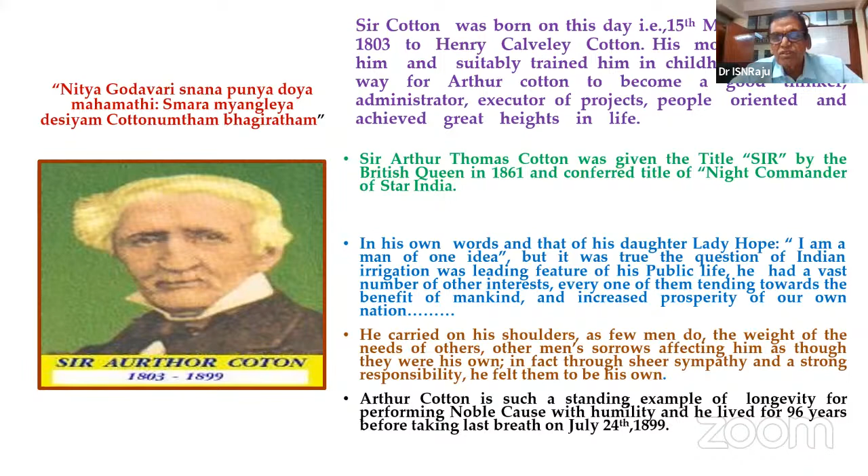So these are some of the achievements I told you about. I think everybody thinks Cotton is only a Delta man, but actually he is a pan-India man. He contributed his might on behalf of the East India Company, which ruled India at that time - so even in the north, south, everywhere.

Even in Visakhapatnam, there was harbor and sea erosion issues. I am told that Sir Arthur Cotton gave his idea of dumping an old ship to avoid sea coast erosion. Like that, he did a lot of things.

And the reason why I have taken this other topic is Krishna Anaket. Actually, Sir Arthur Cotton, after building the Godavari Anicut, conceived and planned for the Krishna Anaket, but he was otherwise engaged, so he gave the responsibility to Captain Orr. So there is a lot of contribution of Sir Arthur Cotton for the Krishna Anaket also. So this is about Sir Arthur Cotton.

The beauty of these Krishna Godavari barrages is there. Still, we can remember Sir Arthur Cotton because the old Anaket, some of the components of the energy dissipation elements, are still part of the new barrages that were constructed. They were used, and the whole Anaket was strengthened because of some components of the new barrages, and the cost was also very, very less. So we can see the resemblances of the old Anaket if you go to Dowlaiswaram and also to Prakasam barrages.

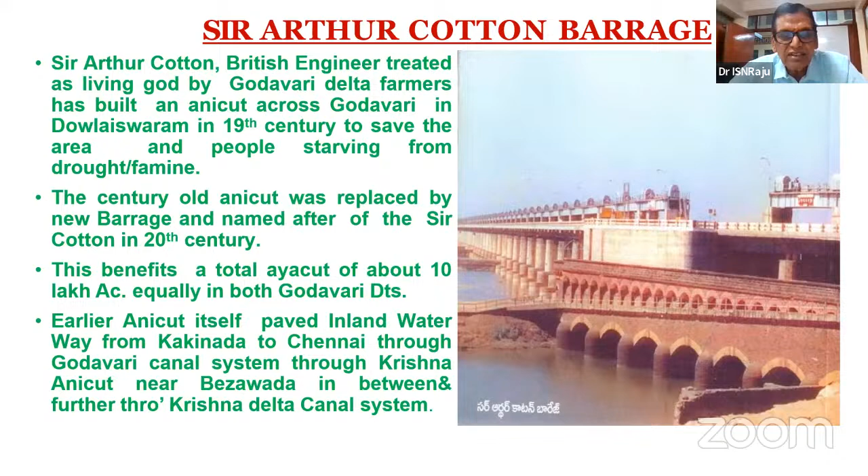So when we compare this, you can see the remains. Godavari Anaket you can see on the left side, and Godavari barrage you can see. I think these salient features and other things are also there. That is important. But today, whatever South India is, a granary of paddy, that is because these two Anakets are a part of that.

So next thing is Godavari Anaket. Actually, that museum was there, and here I would like to read one sloka. That is, even today the people of Godavari Delta pray every day for Sir Arthur Cotton: Nitya Godavari Snana punya doya mahamathi: Smara myangleya desiyam Cottonumtham bhagiratham.

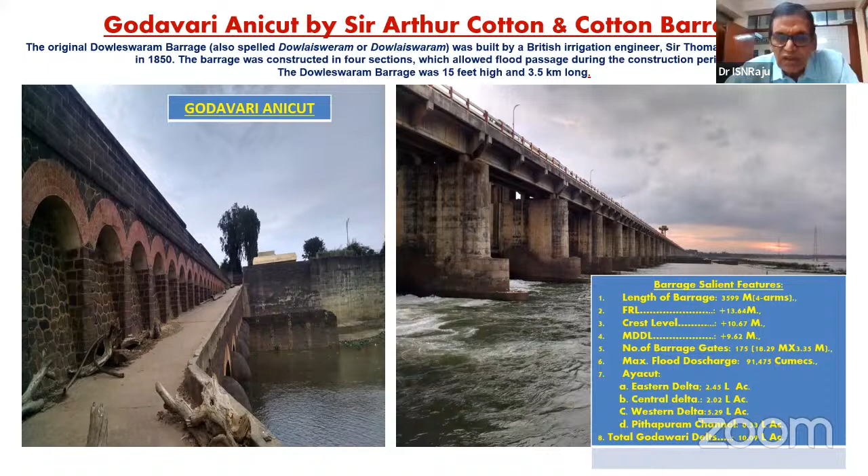So he's a living God actually. Though he is a Britisher, he has rendered service to the Indians much more than any Indian national also—that is his honesty and all those things. That's why even generations together people are remembering him, and even today during prayers on the Godavari River they pray for Sir Arthur Cotton also.

So these are some of the photographs, I am keeping it here. So another important thing, John Henry Morris cited that the Godavari Anaket is perhaps the noblest feat of engineering skill which has been accomplished in British India, for which Sir Arthur Cotton is responsible.

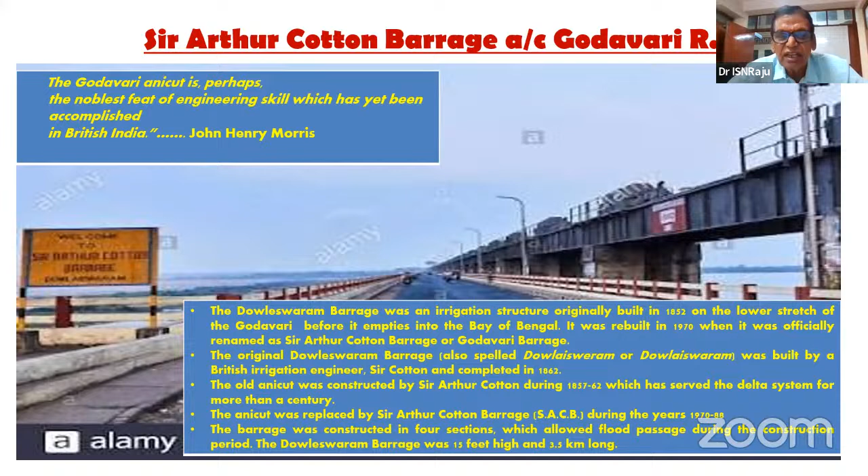After it outlived, after 100 years, everybody says structures will live for 100 years. After 100 years, the Cotton Godavari barrage was taken up, and at that time the Chief Minister aptly named that barrage after Sir Arthur Cotton. Today, for generations to come, people will remember. That is another important tribute to him.

And the Kurnool Kadapa Canal also—actually there is a saying that British and French people also did it. Basically, this KC Canal is meant for inland water transport, but subsequently it became unremunerative. They converted it into an irrigation project, and Sir Arthur Cotton also gave some advice and contributions. Today, what we are seeing is the Kotla Vijaya Bhaskara Reddy barrage. Earlier also an Anakat was there, so it was subsequently modified as the Kotla Vijaya Bhaskara Reddy barrage. That is also a lifeline for Rayalaseema.

What I would like to tell is we cannot confine Sir Arthur Cotton to only the Godavari Delta. He is everywhere. Today, South India is flourishing, and also North India and everywhere, because he was an engineer of the East India Company, and wherever issues were there, his services were deployed.

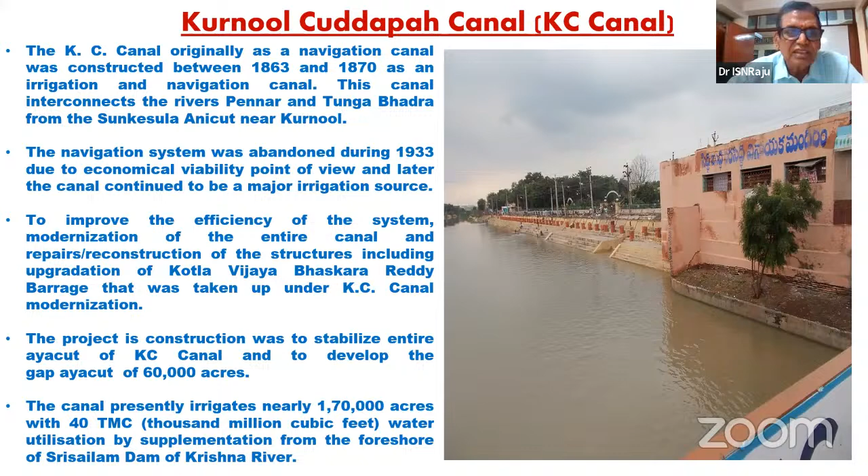So this is about Kotla Vijay Bhaskar Reddy Sunkesula Anicut. Earlier it was constructed, subsequently it was modified. Earlier the French people constructed it; because they could not maintain it, the British took it, some improvements were done, and it was converted into an irrigation project also. So today it is the lifeline, actually the first project for Rayalaseema. Subsequently now a lot of projects have come.

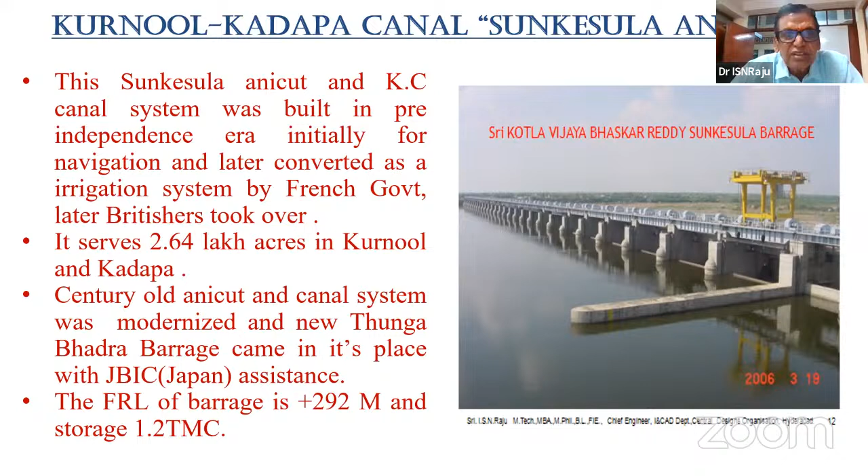And another important thing, Grand Anicut in the Kaveri Delta. Everybody is discussing Grand Anicut, but the original anicut was built by the Chola kings. Subsequently some improvements, expansion of the project and benefits were done, where Sir Arthur Cotton also contributed his might by constructing one supplementary anicut that extended irrigation facilities. So Grand Anicut is famous in history, and it also reminds us of the contributions of Sir Arthur Cotton. You can see the beautiful Grand Anicut.

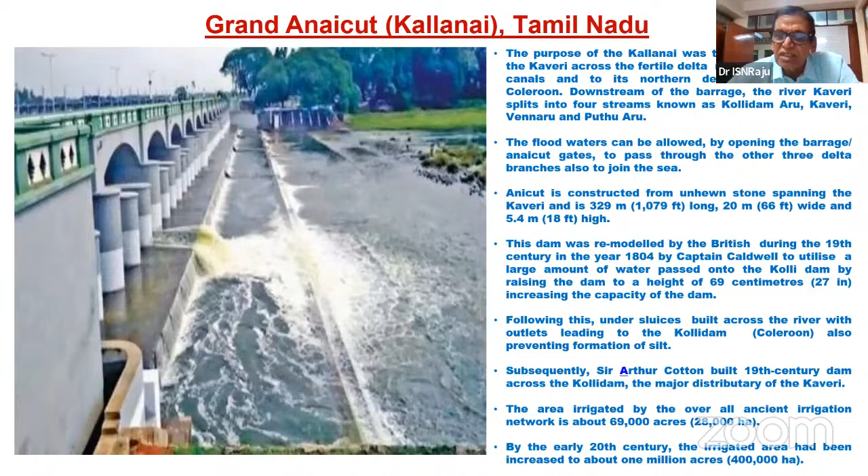So Sir Arthur Cotton during the 19th century built a dam across the Kollidam. That is an interlinking; some flood water was going waste, so he built this so that some water can be diverted and irrigation facilities were extended beyond what was originally contemplated, nearly about 2 lakh acres. Originally it was built to benefit about 69,000 acres, but by stage-by-stage enlargement, in the 20th century it is giving a benefit of nearly 4 lakh hectares.

So Krishna Anicut: I told you that Sir Arthur Cotton and Captain Orr both are responsible for this one. Once the Godavari Anicut was completed, Sir Arthur Cotton concentrated on the Krishna Anicut because a lot of water was going waste into the sea. He finalized the Krishna Anicut proposals, and Captain Best and Captain Lake also associated with him. It was presented to the East India Company, and based on the convincing presentation the British approved it.

So actually, that served about 100 years, and after outliving it, in 1953 in the combined Madras state, Tanguturi Prakasam was the chief minister. So he built this present structure we are seeing: Prakasam Barrage, the Krishna barrage, which is also very popular. This barrage is giving benefits to nearly 13 lakh acres. Put together, Krishna and Godavari are giving about 23 lakh acres of major irrigation. That is not a small thing.

Now everybody says a major irrigation project is benefiting about 2 lakhs, 3 lakhs, 5 lakhs, or 10 lakhs. But about 150 years back itself, these two projects gave such huge benefits and paved the way for inland water transport, the most environmentally friendly transport at that time, with zero fuel cost. At that time roadways were also not there, so people used to travel on launches through this canal system. In my childhood I also traveled on these launches to reach some of my relatives.

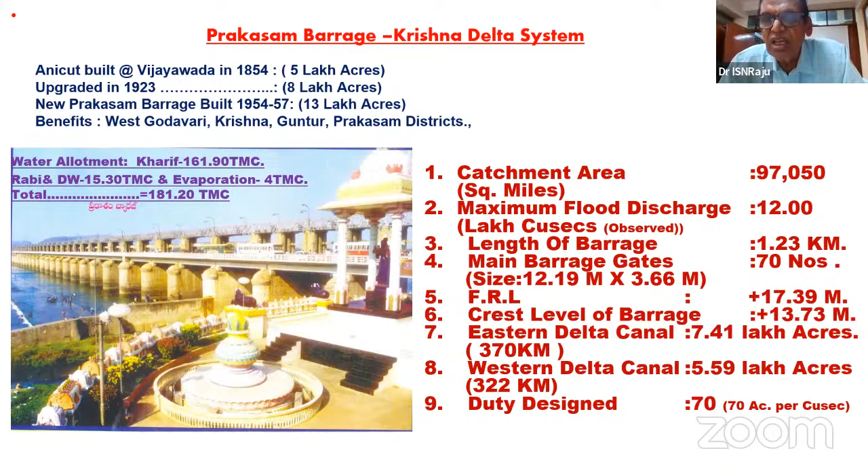So it is a barrage of 1.23 kilometers, and it was designed for 12 lakh cusecs, and 70 gates are there. You can see almost the same size of gates both in Godavari and this one, but the number is varying. So it is a simple diversion structure, with a design duty of 70. So you can see the beautiful view of the Prakasam Barrage on the upstream side.

Every barrage will have a dry bed, but the Krishna barrage does not have a dry bed, because one thermal power plant is there. Thermal plants require water for all 365 days. So the water will be stored at this barrage from the commissioning of that thermal power plant till 2000. So there was never a chance to deplete and do some repairs and identify any failures.

That's why ultimately, after a lot of thinking about upgrading the life of this one, the rehabilitation of the Prakasam Barrage was done. Fortunately, God gave me the opportunity to work as superintendent at that time, and that is another important event in my service. Some photographs are there. So it's a case study. It is almost a tail-end dam. The Krishna river originates

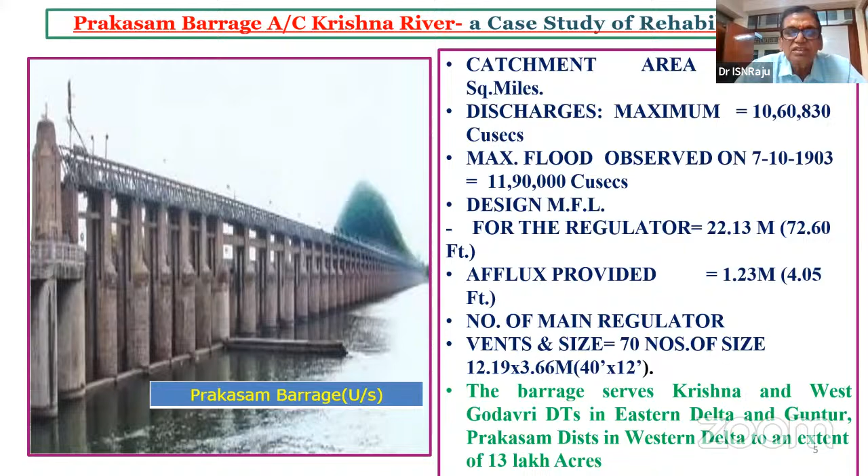in Maharashtra. All of my presentations will be self-explanatory in sequential order. So I have given the definition of retrofitting and rehabilitation. Both mean almost the same thing. Retrofitting is normally used for bridges and buildings, while rehabilitation is for dams, the water-retaining structures. Retrofitting is a method or process for strengthening the structure, a technique used to enhance safety against any likely damage. Retrofitting avoids expenses for new construction. If you don't retrofit, the structure will collapse and we have to go for a new structure, which is much more costly. So if you retrofit it timely, we can extend the life of the structure and benefits will also accrue.

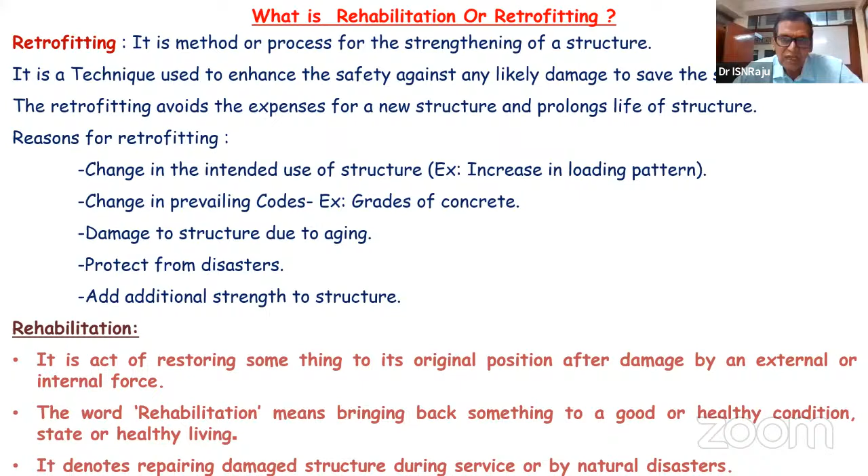Rehabilitation is an act of restoring something to its original position after damage by an external or internal force. The structures are constructed with the standards as on the day of construction. Subsequently, a lot of modifications and upgradations will be there. So when the structure is online at the present day, the authorities say to test the stability of the dam, whether it withstands the latest threats. That's why the rehabilitation was necessitated for the Krishna barrage, because the dry bed was never allowed for nearly about 25 years.

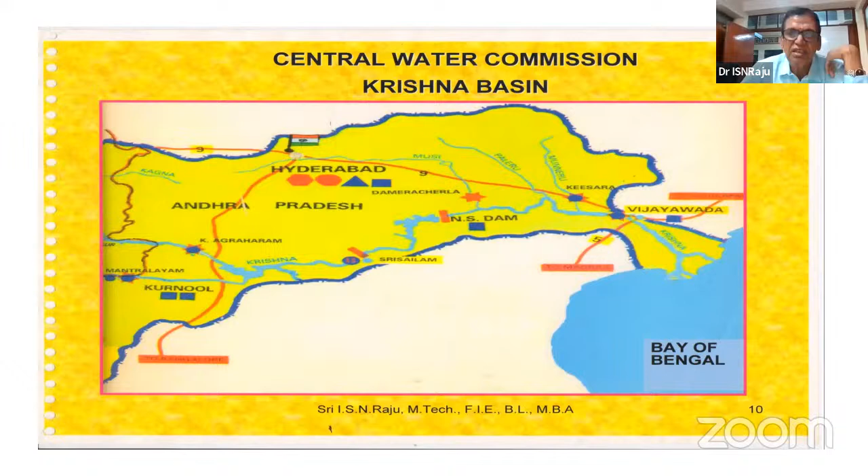You can see the catchment area plan: the origination of the Krishna River in Maharashtra and ultimately emptying in Krishna district. So the tail-end dam is at Vijayawada. It is almost the tail-end structure. Other barrages are planned, but they have not yet come into construction. This is a line diagram: the first structure is Almatti and the last structure is the Prakasam Barrage. In between Nagarjuna Sagar and Prakasam, the Pulichintala project has also come. So this is the flow.

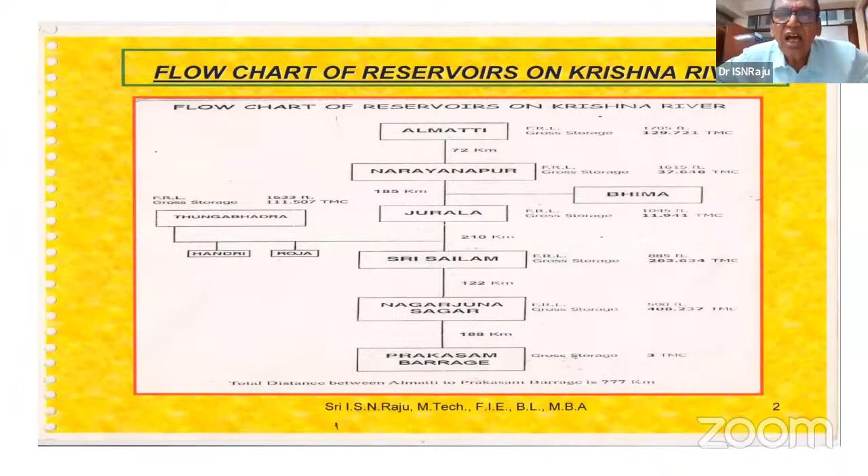This flow diagram is very important for operation, maintenance, and flood monitoring, because when a flood occurs at Almatti, there will be a travel time. Actually, in 2009, when I was a special officer, we forecasted the flood, how much it will reach after 24 hours and 48 hours.

And with great work done by the combined state engineers, we were able to avert the flood damage, the havoc could be prevented. So this was teamwork, but I played a small role in that.

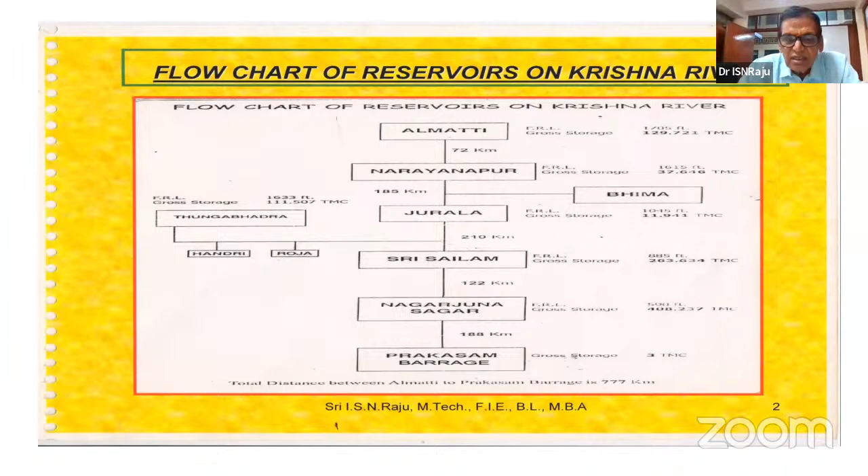So this is Sir Arthur Cotton's barrage, formulated and built by Captain Orr. You see how beautiful it is, and it cost only 2 crores. Nowadays, even a small minor irrigation tank could not be done with that. But such a capital investment of 2 crores has given a benefit: earlier it was 5.8 lakh acres, and it was increased to 8 lakhs. So there was also upgradation.

Actually, the Britishers at that time also did retrofitting, rehabilitation and upgradation. By having automatic falling shutters, the FRL was raised and an additional nearly 2.5 lakh acres came. At that time, operating the falling shutters manually was impossible during flood. So they used a steam engine, and rails are also there. I could not capture that. Using a steam engine passing on rails, they used to lift these gates once the floods receded. So that is the beauty of it.

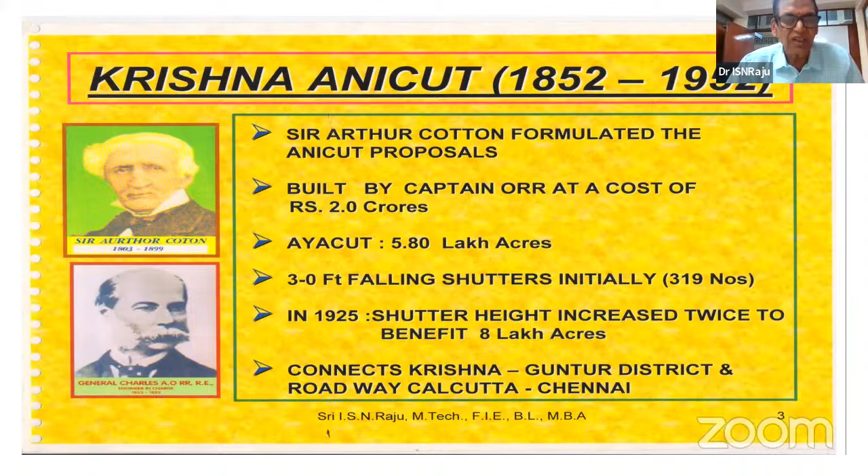Subsequently, after 100 years, in 1954, Sri Tanguturi Prakasam, another legend of Indian politics, a selfless man, built this one. Today, the granary and food production level of the Krishna Delta is because of him. Actually, these two barrages, before the national highways came, became a communication facility for crossing. Before that, I am told that even lorries used to cross the river by loading them on pontoons. That was the position in the 1940s and 50s.

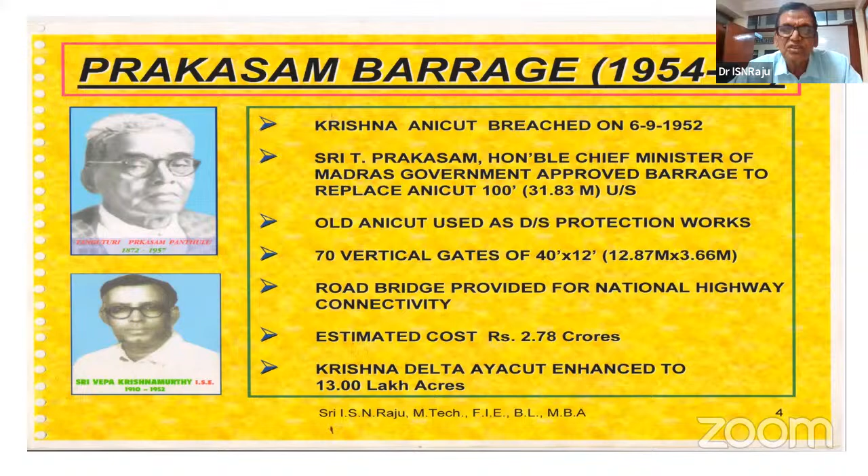So this is about Prakasam barrage, and another important man the present generation cannot recollect is Mr. Vepa Krishnamurthy. He was a superintendent engineer involved in the Prakasam barrage construction. Unfortunately, during the construction, he met with an accident in the floods where he had gone for inspection of some flood mitigation, and he succumbed. He lost his life while in service, constructing this barrage. When I was superintendent engineer, I chose to have his statue there. We can see that also. The great engineers are all our inspiration. We must remember them forever. For generations we are enjoying that.

So these are the salient features. You can see it during flood time. This is about scour vents and other things. The barrage, you can see, is a floating structure. It is a diversion; we cannot expect any storage. It is only for diverting water by gravity onto the canals at the required depth. Otherwise, if lift irrigation schemes are there, you must have the storage, a water level for lifting, a high water level and low water level portion. Only then will the barrages live long. This is my personal opinion from my experience.

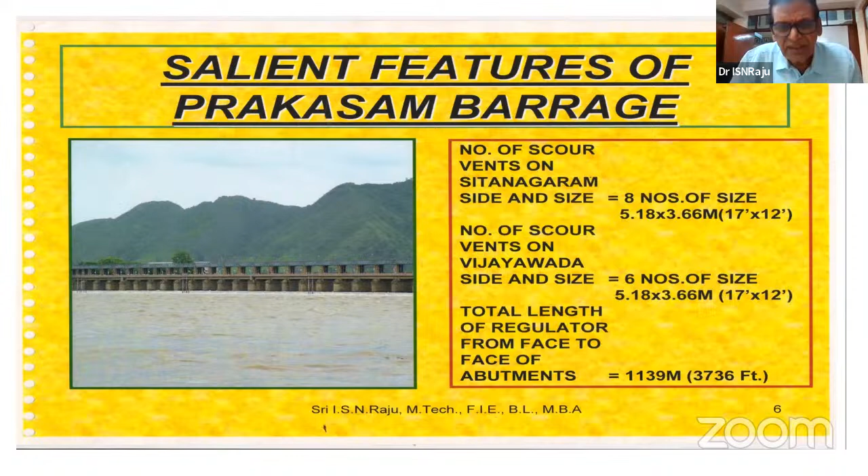I am telling you, today you can see the beauty of this barrage: on one side is the famous Kanaka Durga temple. People from North India, West Bengal, and lots of places come to have darshan and the blessings of the goddess. So that is the beauty, at one end is this goddess. People say the Krishna district area was protected by her with all her blessings. Similarly, the barrage might also be her blessing.

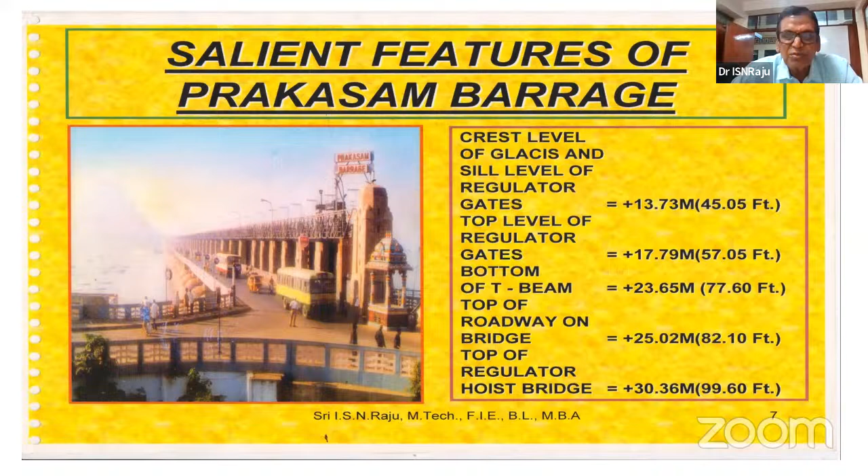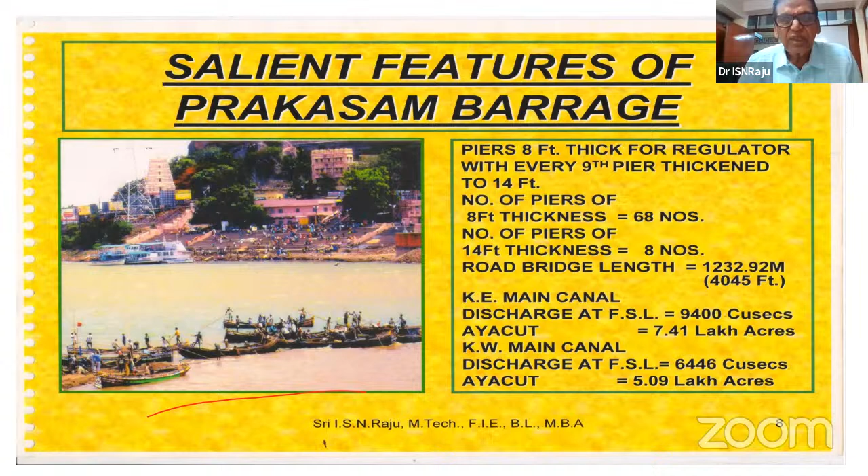So actually during that rehabilitation time there'll be water. I think building a coffer dam and building a new barrage is very easy, but retrofitting rehabilitation is very difficult because there will be standing water. We have to form a coffer dam. So we deployed a lot of these country boats to take the sandbags. As you can see the scene here, because I was there in the project, I was able to capture all these pictures.

So this is about the river canal system. This is the flow diagram. Actually, I got the command area map, but you could not able to see much. That's why I deleted it. So on one side it is Eluru, the canal on the western side will go there, and the eastern side will go up to almost Nellore. It touches almost Nellore.

But here actually locks were introduced by Sir Arthur Cotton. The lock means, in roadways when crossings are there we will have flyovers, but in a canal system locks are the only way of negotiating the level. Because Godavari canals are at a lower level whereas Krishna is at a higher level, the lock was built where boats and other things use the lock to enter into the canal system. Still, the locks are very much existing there.

And now there is a proposal of improvement to this waterway also, from Kakinada to Puducherry. Initially the government made a beginning, but it is going on slowly.

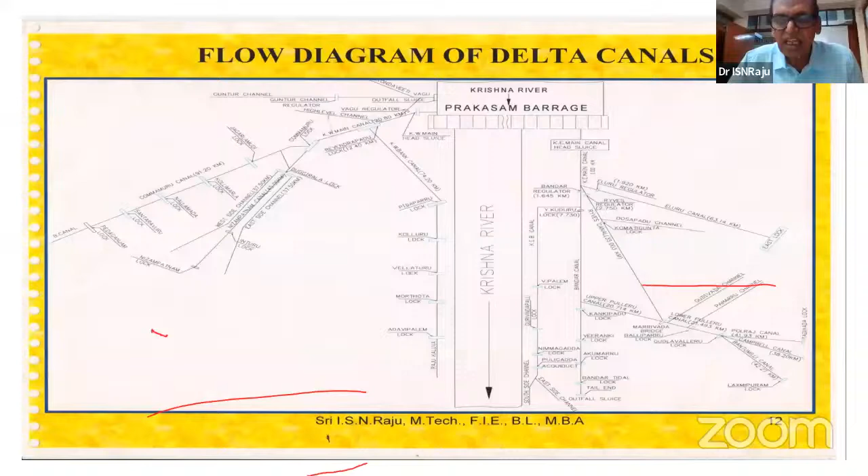So in rehabilitation, a series of wells will be there. Unlike a sheet pile, it will not be continuous. When two wells are joining each other, some gaps will be there. The gaps were filled by casuarina ballies. But casuarina ballies decay in water, so they get damaged and gaps have happened. So in rehabilitation, on the upstream and downstream side, we have taken these sheet piles from one end to the other end. That is the most important thing.

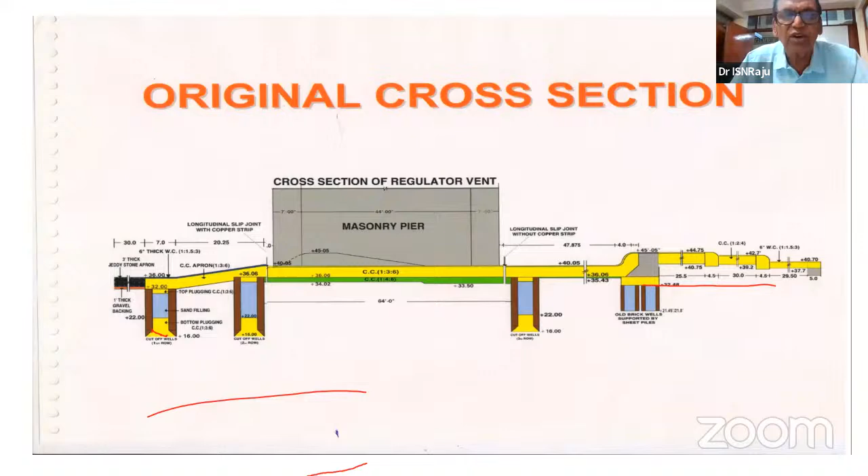So why the rehabilitation was done: up to 1978, till the thermal power plant was there, you would have a dry bed like any other project. We had naked eye inspection. We used to do some repairs on the upstream side. But once the thermal power plant was constructed there, utilizing the water availability of the Prakasam barrage, the beauty is that cooling of water is by gravity. So by maintaining a water level in the Prakasam barrage, water flows into the thermal power plant, and after cooling, water is returned.

So because of that facility, and power is the need of the hour, we cannot afford to stop the power plant for making repairs to barrages. The risk was taken till 2000, nearly about 24 years of impounding the barrage, and no repairs could be done on the upstream side, only the downstream side. Even replacement of gates is also a problem. We used to have floating bulkhead gates whenever problems were there. So that is the scenario.

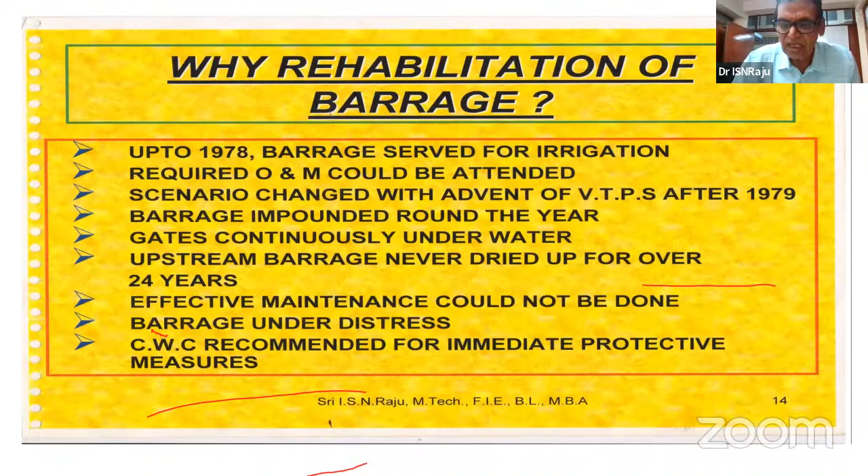Another important thing is it was designed for the earlier flood at that time, but subsequently record floods have enhanced. So one of the definitions of rehabilitation is to increase the life of the structure to the present standards. The present standard is it must withstand the flood that has come. I will explain how much flood came in 2009. Any repair cannot just happen like that. An expert committee was constituted, and they gave some recommendations.

So the recommendations were gates repair and downstream and upstream protection. Simultaneously we had to supply water for the delta system, and the thermal power plant also made some lifting arrangement of water for cooling towers. So it took nearly about 3-4 seasons without hindering the irrigation benefits and also the cooling water.

That's why it has taken about 3-4 seasons. So we have planned in each season how much quantum of work we can do. So some 70 gates are there; in one season we replaced 35 gates, and in the other season the other 35 gates. So in the beginning we did some downstream protection of sheet piling in 2 seasons.

And after these seasons were completed, on the upstream side we made a coffer dam. That is a very difficult nature of coffer dam. I will tell you about that and how it was done, and we were able to do it in a span of about 3 years.

Actually, I got an opportunity after becoming Chief Engineer CDO. Also, I have gone for inspection of those protection works and subsequent measures to be taken. I feel that God has given an opportunity of working in these areas, especially being a farmer's son. My father made me an engineer, but the government has given me an opportunity to work in this field where I can contribute with the background of my farming community.

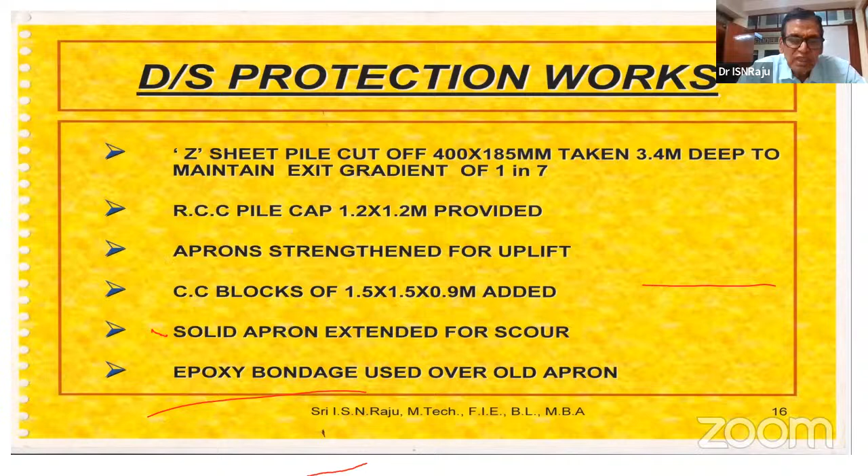Every day we are seeing in the papers that the apron lengths were not sufficient, and because of that some issues have happened in recent times also. So when we are doing a rehabilitation, old concrete will be there and new concrete, so there must be bonding. So we have used epoxy bonding between the old concrete and new concrete. This is the technology that was done.

So on the downstream side, the depth of the sheet piles we have gone to is about 3.4 meters. That is the requirement of creep length and also the exit gradient calculations. The RCC pile cap was made 1.2 meters by 1.2 meters. You know that the safe exit gradient for any barrage is 1 in 4 or 1 in 5, but when we did the sheet piles and worked out the exit gradient, the safest exit gradient of 1 in 7 came. That means the life was increased. So it was able to withstand the flood of 2009 also because of the improvement.

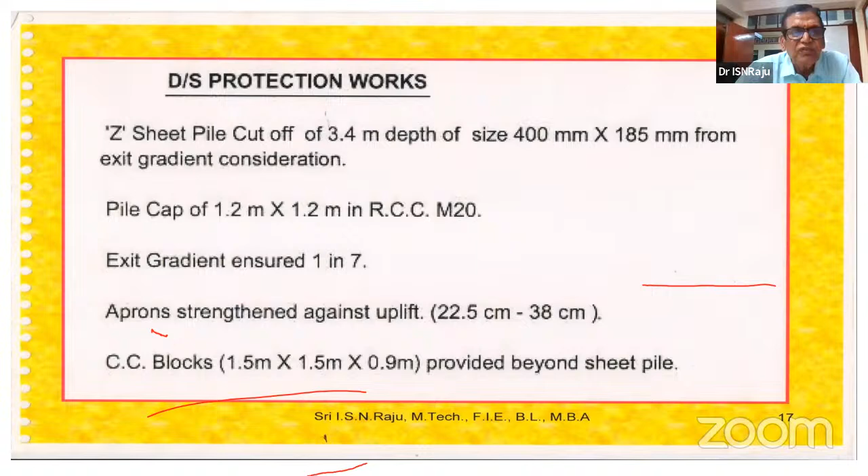So the aprons were also strengthened by thickening them. Downstream side, the CC blocks are all flexible energy dissipation arrangements. And one important thing I will tell you is the apron concrete structures will remain, but the CC aprons followed by stone packing get disturbed every flood. We have to restore it.

This is the exit gradient calculation. Before taking up sheet piling, we made all these calculations and ensured that the exit gradient is much beyond the safest level, that is 1 in 5. Now we got about 1 in 7.75. That's why by doing the rehabilitation, the life of the barrages is also strengthened or increased. Otherwise, due to the floods, something could have happened.

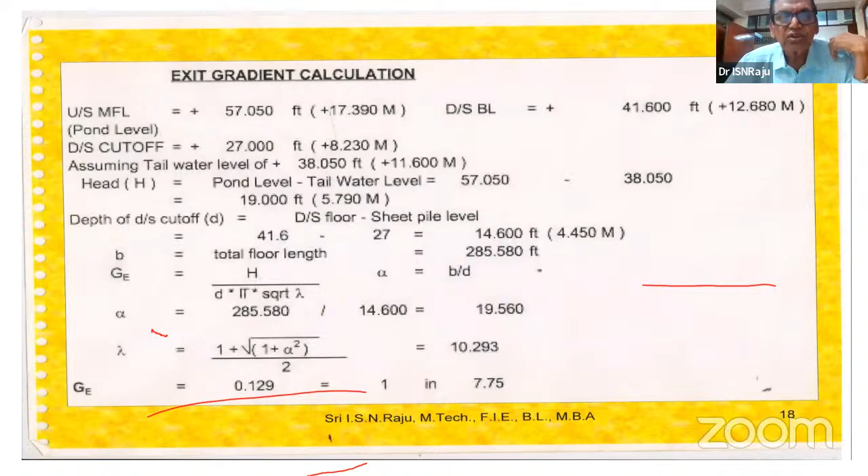But for God's sake, it was done in appropriate time. So that's why the barrage is safe, and now its life is also extended.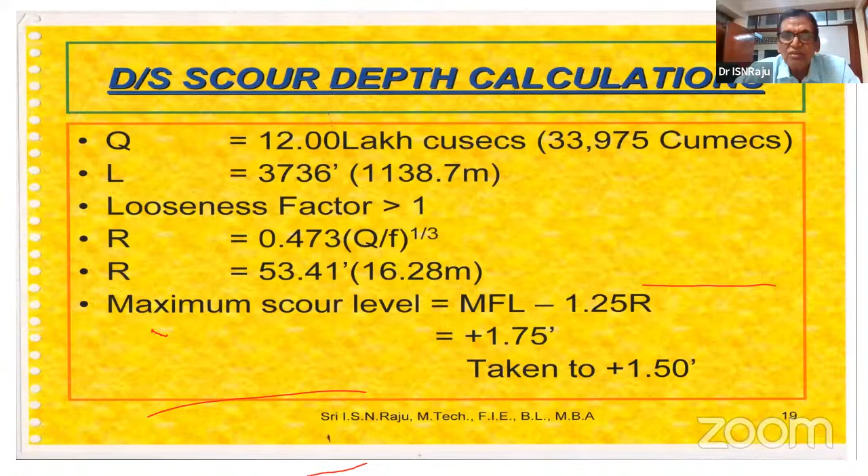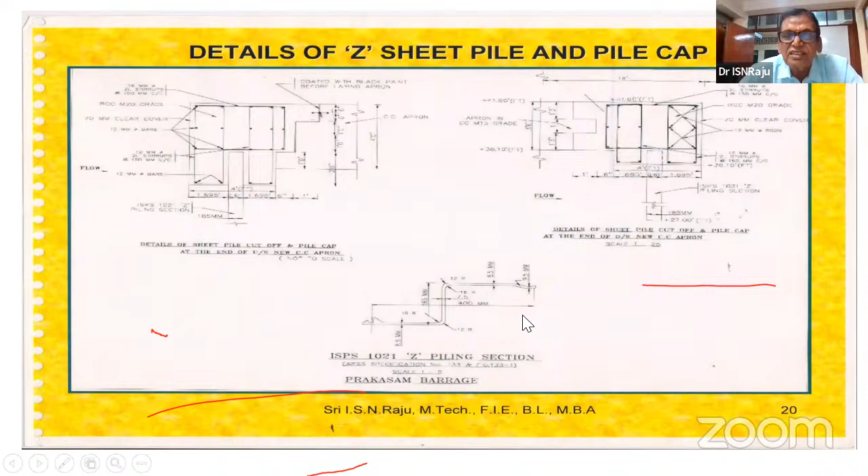These are the single individual sheet piles you can see, this one is Z type sheet piles. Again, the Z type will continue with the roof. These are the details, and this is the pile cap and other things. As I told you, this presentation will be made available to everybody so they can go into details of this.

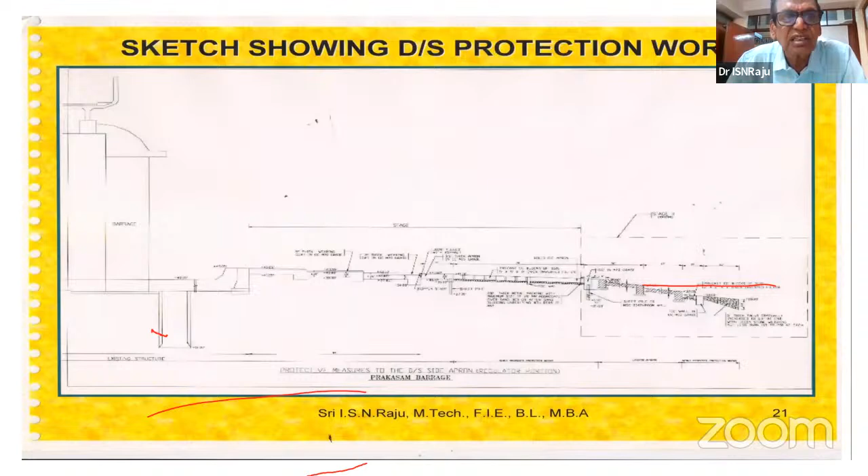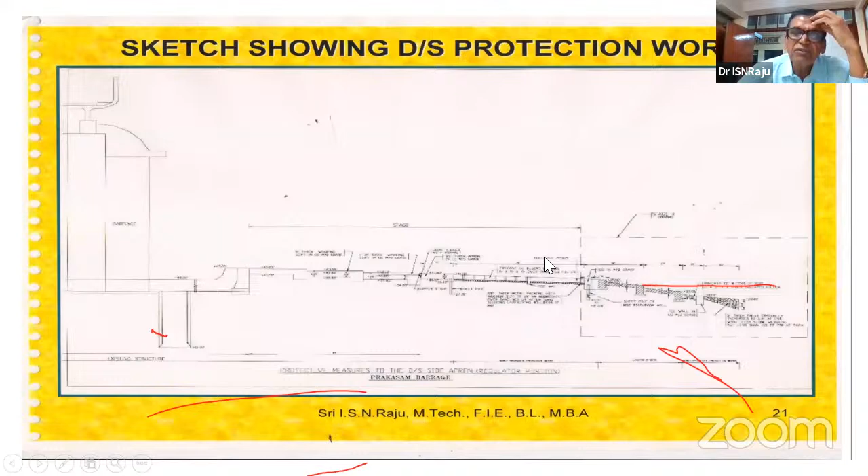This is actually the drawing showing the downstream protection works. You see that these are the well foundations. There were gaps, so ultimately we went for a sheet pile at this point, and the aprons were strengthened and extended also. After testing the performance, we would go for a third phase, because on the upstream side another project has come, so there was much need for further repairs. It is standing well. You can see this is the downstream cutoff.

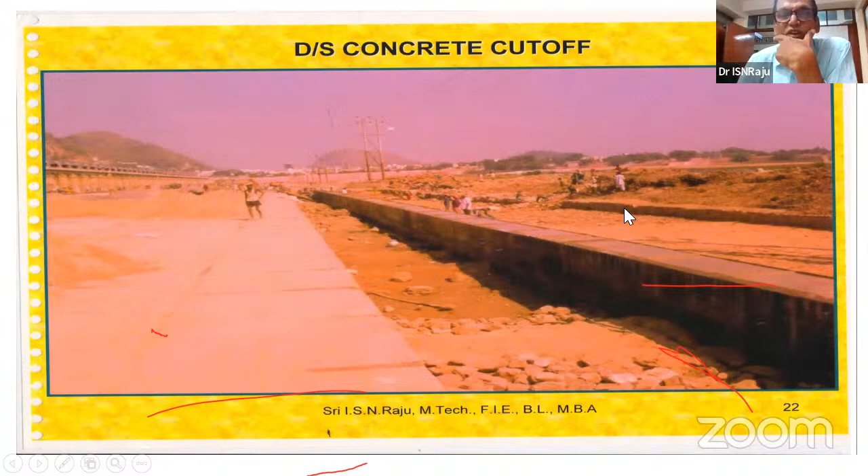Actually the sheet piles were driven over the pile cap. In between the glacis and this, these are all the concrete aprons, and concrete was laid. Beyond this, dry stone packing and CC blocks are laid, and beyond that dry stone packing was also done. So I told you about upstream protection works, whereas these are the downstream protection works.

Now the last phase, after drying up the bed by having a most difficult coffer dam, done in the water, we took up this sheet pile work. Here the depth that was taken to is level about 3.05. Normally the upstream cutoffs will be higher and downstream cutoffs will be lower, because the scour will be more on the downstream side, so that depth will vary.

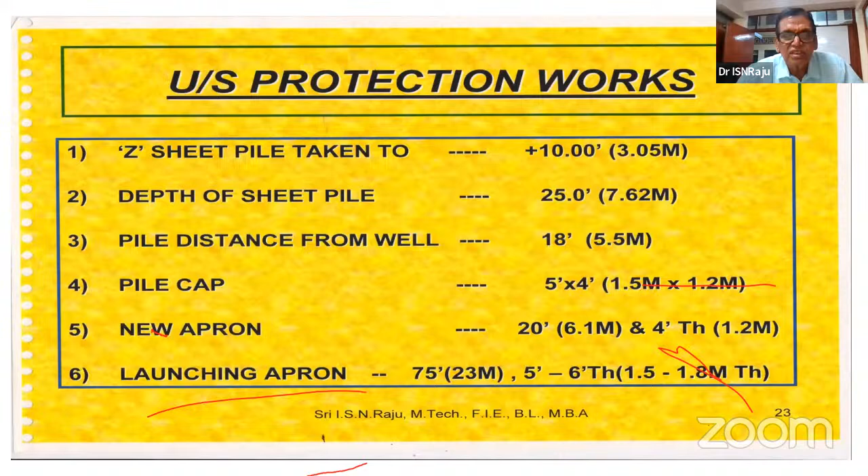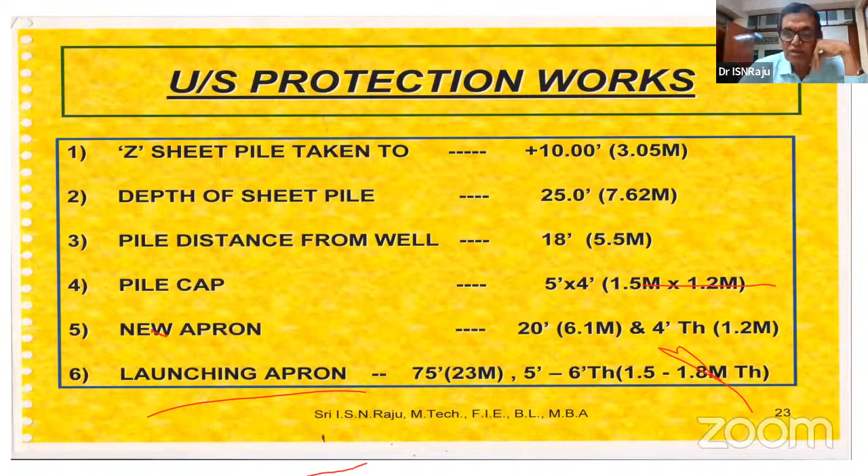We also made the calculations of this side to determine what length it was done. Even on the upstream side, apart from the sheet pile connected at either end, because there should not be any gap, the apron concrete was also laid and the launching apron was also laid. So this is the upstream protection we have done.

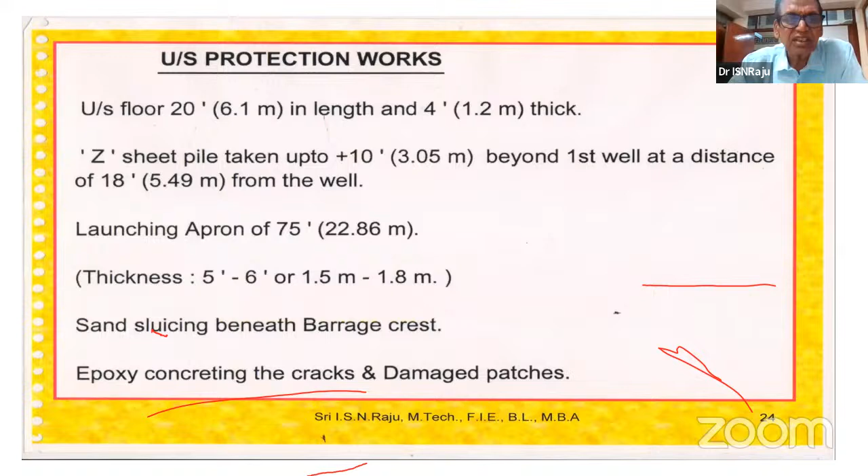So it had gone to a depth of near about 3.05 meters, up to that level, because Anicut and barrage at that time were all indicated in the FPS system. Now both FPS systems are much more acquainted, and we are still using that one.

This is the upstream side protection, you can see these sheet piles. Earlier these wells were there; now we have provided the sheet pile continuously to this depth, taking care of the scour length, and it also increases our creep length. The criteria for the depth is to increase the creep length and exit gradient, not that it will be embedded into hard rock, that is not available. Even if you go 30-40 meters below, only sand will be there.

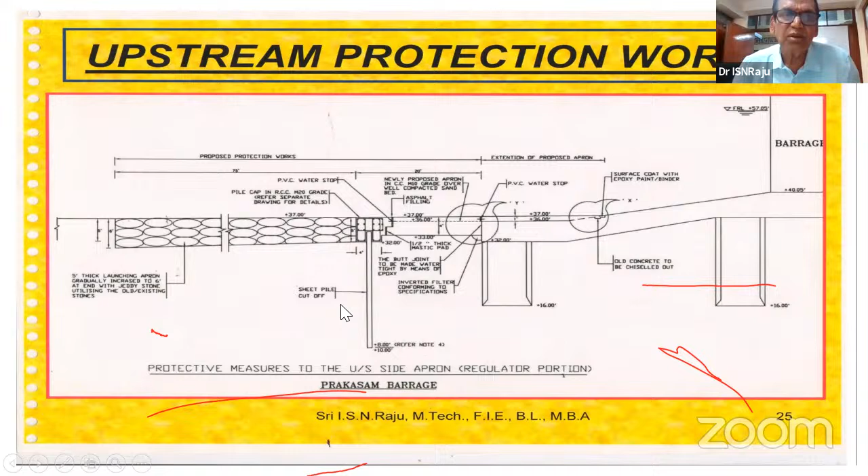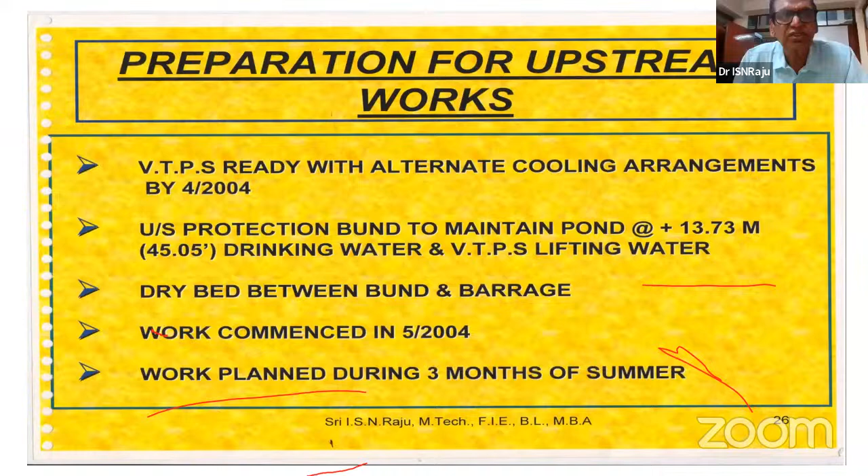So any structure built on sand is called a permeable structure on permeable foundations. VTPS was asked, when we were doing the upstream protection works, to have their lifting arrangements ready, and the cross bund was done, and they took it up to that point. The delay in this protection was because of VTPS's pressure on the government, since they could not afford to lose power production, but ultimately wisdom prevailed and we were able to do it.

Now, if you see, after everything is done, we will just see the total face of the protection works only.

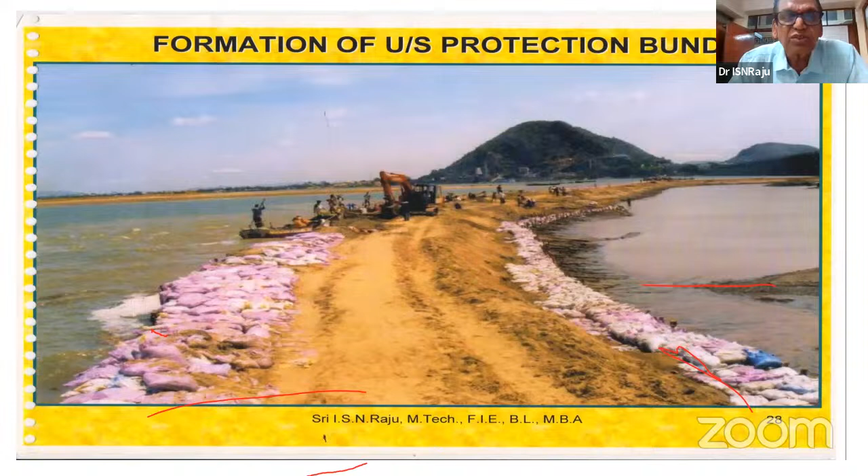So this is the upstream and downstream side. We have driven the ballies supported by the sandbags, and in between we filled the soil that was brought. You can see the upstream side is very, very difficult for this cofferdam.

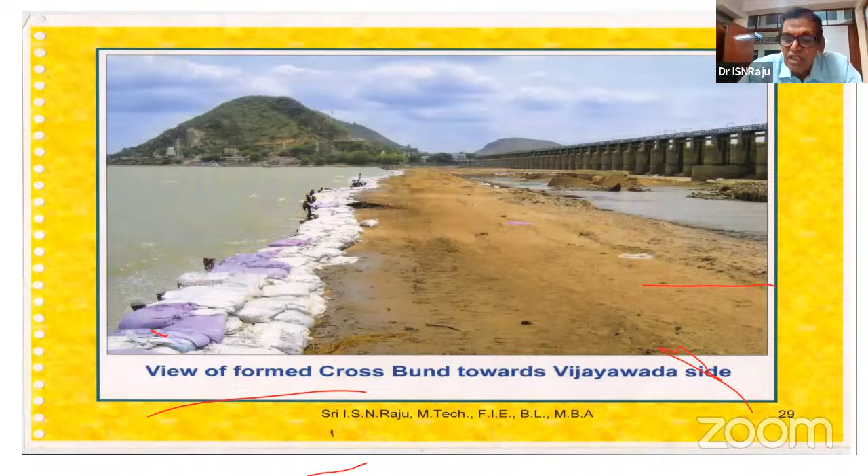What we call a coffer dam was there, so drying of the bed was there. After that only it was done. So you can see the first time dry bed after 30 years.

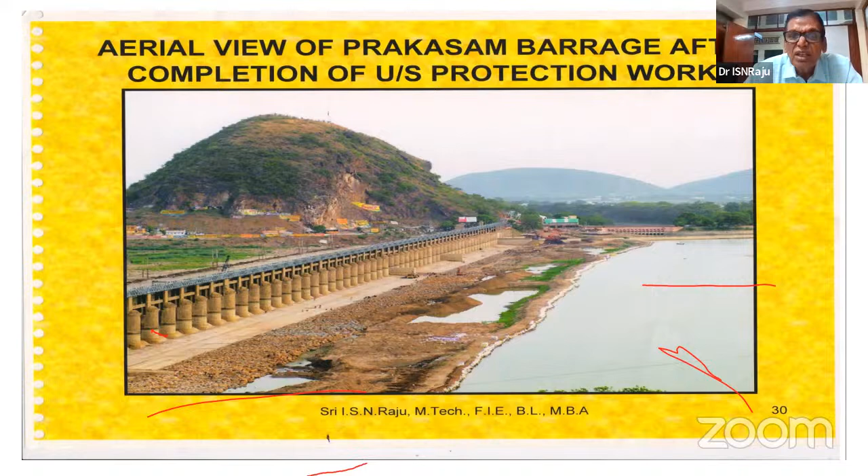You can see the upstream side, never was it repaired on that side. And you can see this is the coffer dam, here. It is opened and we have taken up the repairs here.

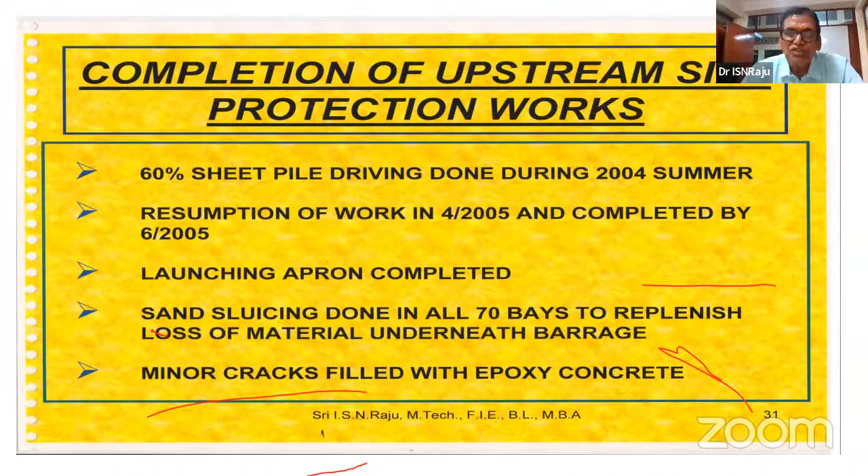During different seasons, I told you that up to 2004, 60% work was done. And for this entire rehabilitation, we spent hardly less than 20 crores only, but it has increased the life by another 20-30 years, I think that is it. But we cannot afford if something happens to the barrage, so the entire 13 lakh acres of irrigation will go out of control.

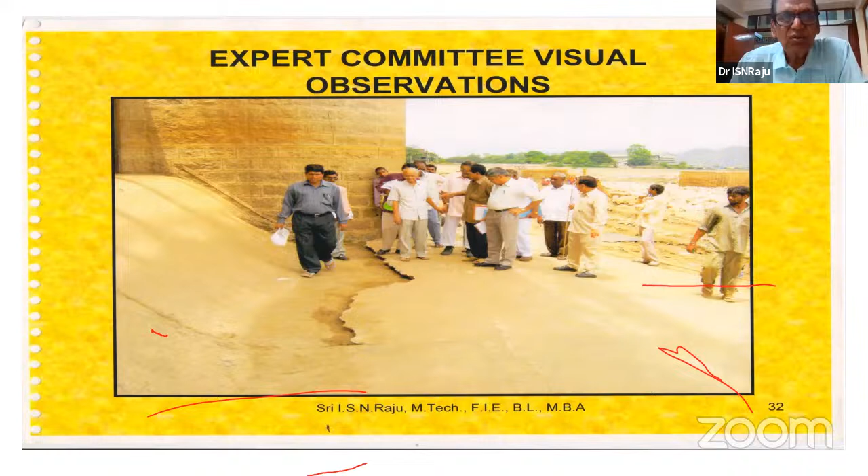So this is driving of sheet piles, not that much easy. By hammering, for smaller depths we can do hammering, but we have a tower head there. With that we are driving them without any gap, joining each other. That was done, so it is a very excellent task.

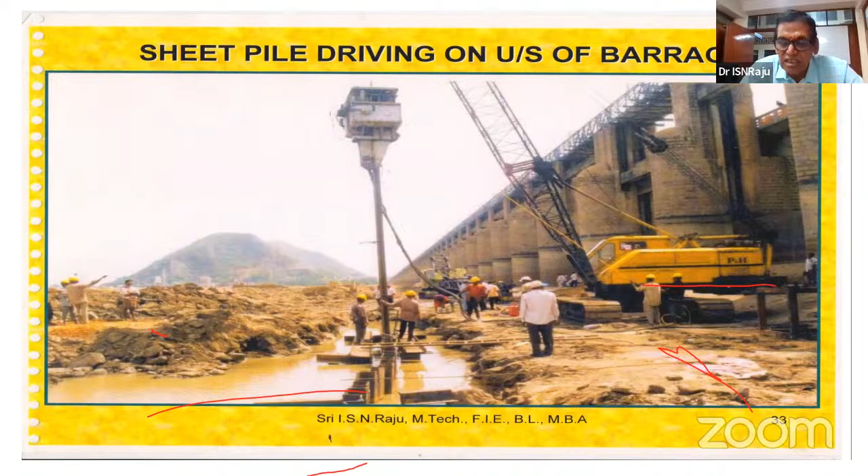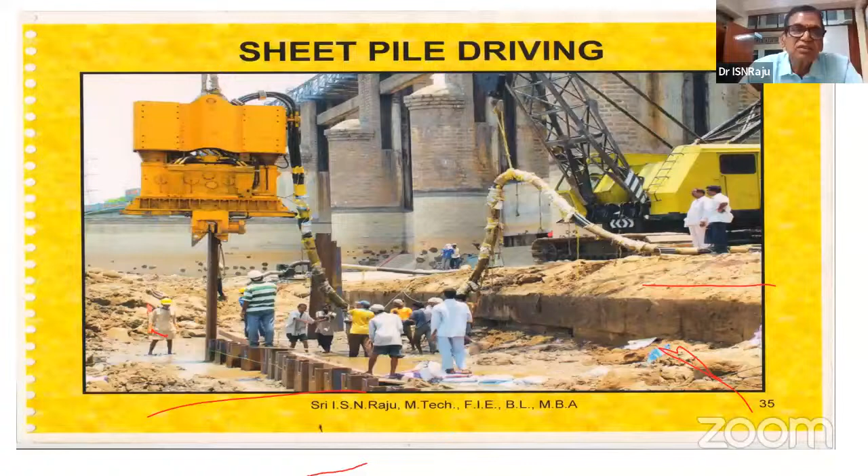We use a lot of cranes there. The alignment is also very important, that was done. So this is actually the driving of sheet piles. You can see the head tower, and we also have compressor air that was pumped into this. After that is completed, that is the pile cap.

You can see the pile cap in between the pile cap and this barrage. This was actually RCC, and the apron was laid in between this one also.

So these are all the different scenarios. Even at that time, I think Chief Minister Chandrababu Naidu, at that time it was initiated, and subsequently Rajshekar Reddy Garu, at that time it was completed. He has also visited this.

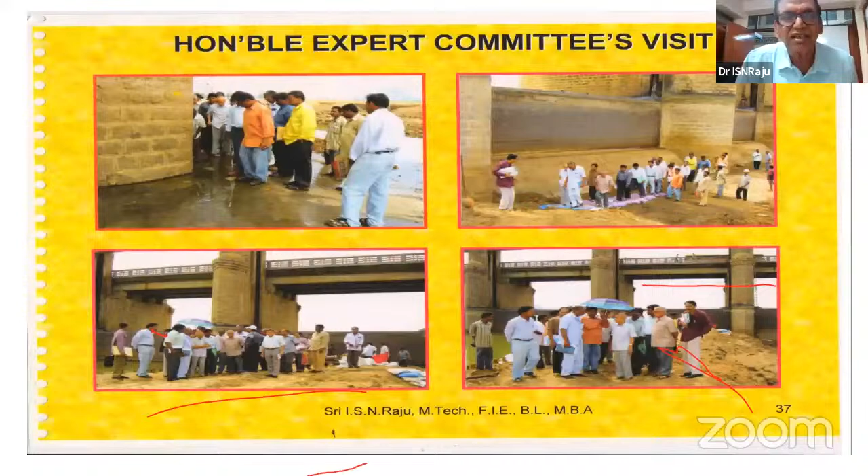The engineers working in the irrigation department, generations together, will remember this as a great opportunity. It is a small project that benefits generations. People will remember who the engineer was that worked on it. That's why even on the 222nd birthday we are remembering Sir Arthur Cotton, and like that, many contributions subsequent engineers have also made. You must always do it.

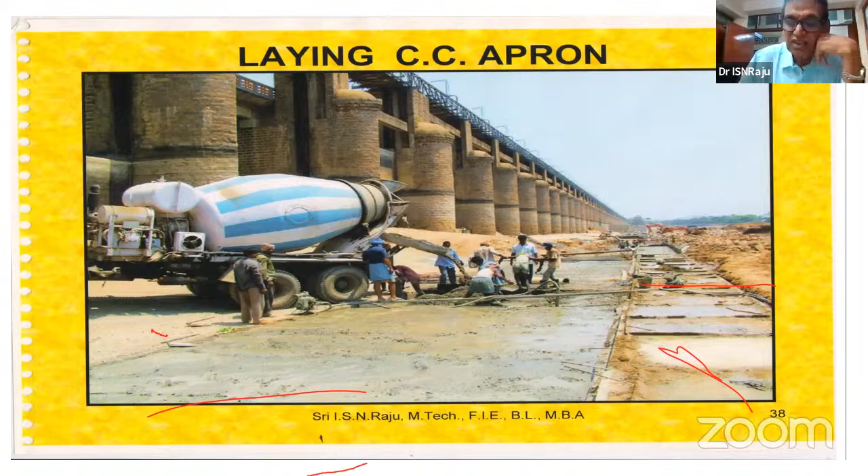It's a very, very helpful task, but it's a challenging thing, yet it's the pride of engineers and the department also. The public have recognized and they give a lot of positivity about the department because of works like this that were carried out.

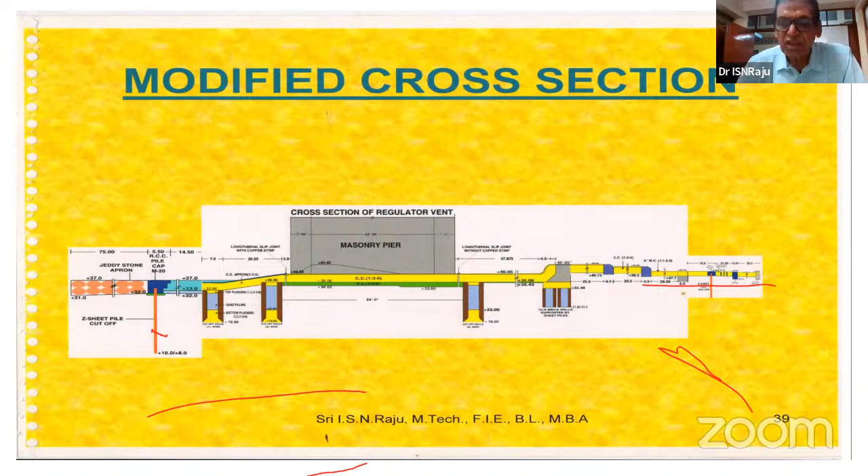Extending the apron and strengthening of this wall were also done. You can see the depth of water is about 4 or 5 meters. That's why experts at that time said they purely took the barrage as a diversion structure, not for storage purposes.

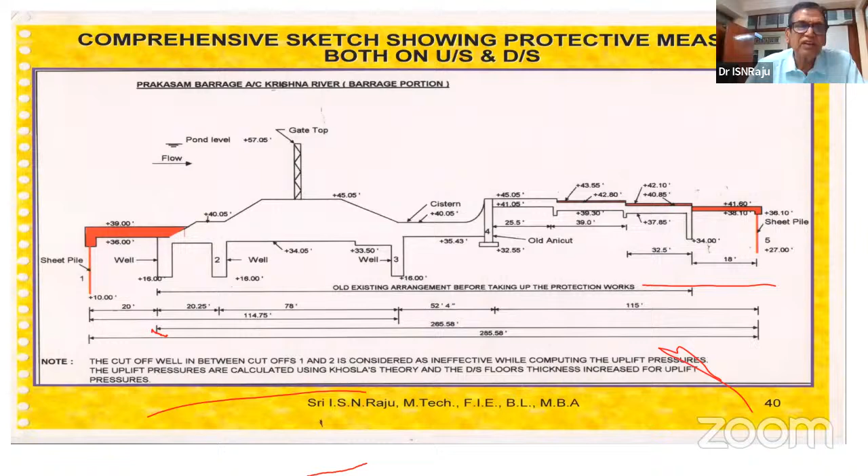Upstream, in Godavari there are more projects, and in Krishna River we have upstream projects of Srisailam and Nagarjuna Sagar, which release water whenever required for drinking water or other needs. Now we also have the Pulichintala project in between. After the third phase, we had planned to do this, but since another project came up, there was no necessity felt, and the barrage is safe even for the 2009 floods.

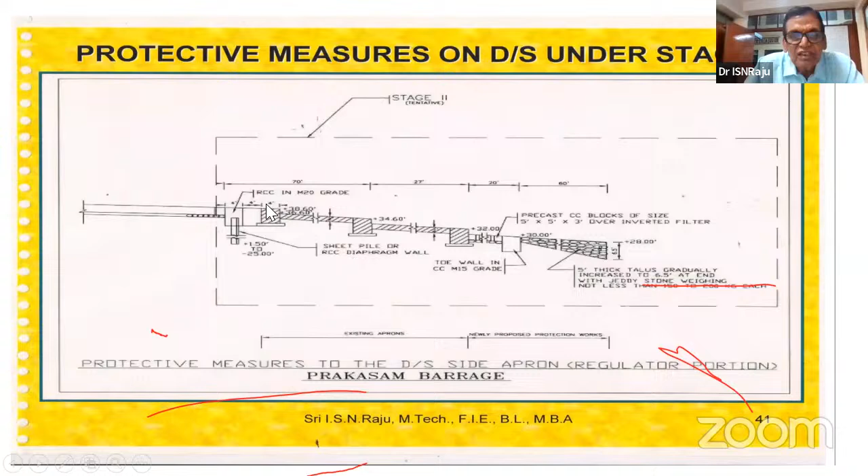So 70 gates were rusted. I told you that whenever individual gate repairs were needed, we used floating bulkhead gates to do it. But all 70 gates were neither painted on the upstream side nor replaced. Normally gates are replaced on a cycle of 7-8 years.

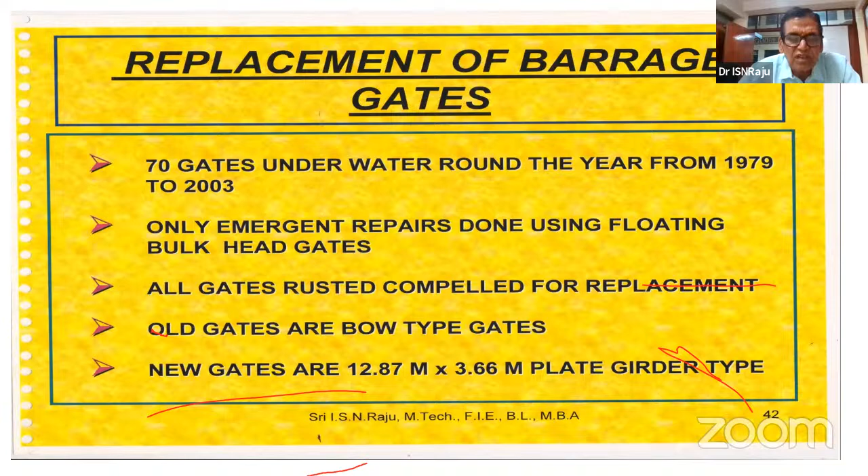This is the old gate and the new gate. The old gates had bow type designs, now it's girder-type gates with girders. The old gates weighed 18 metric tons, now they are about 22 metric tons. That is a very Herculean task.

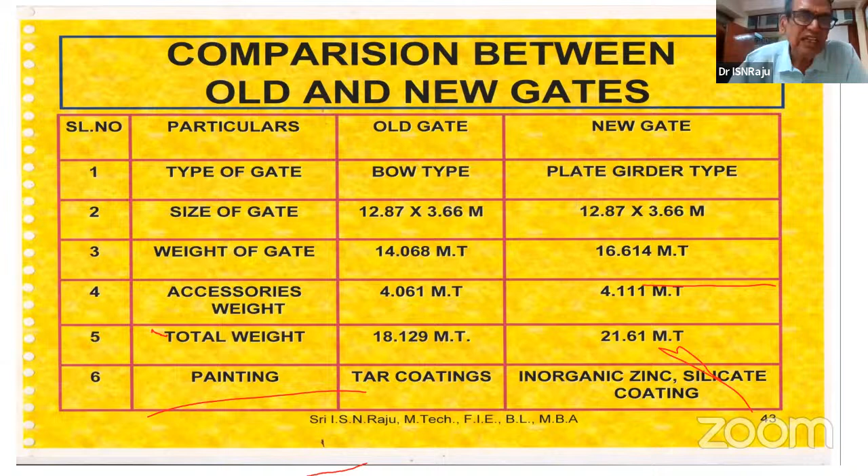The painting and all specifications, all care was taken. I'm proud to say all this was done with internal design capacity and internal designs by CDO at that time. That much was the confidence of CDO, and ultimately CWC also appreciated it. Only for the gate designs, some help was taken for proof-checking, referred to CDO, but all civil works were done internally.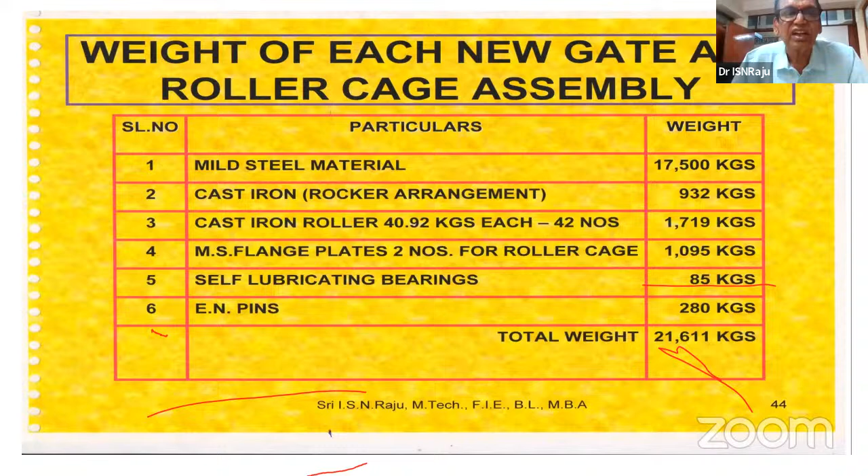This shows the different components of this structure. Ultimately, so much weight, so much steel was used. Through different phases, we were able to complete the erection 3 months ahead of schedule.

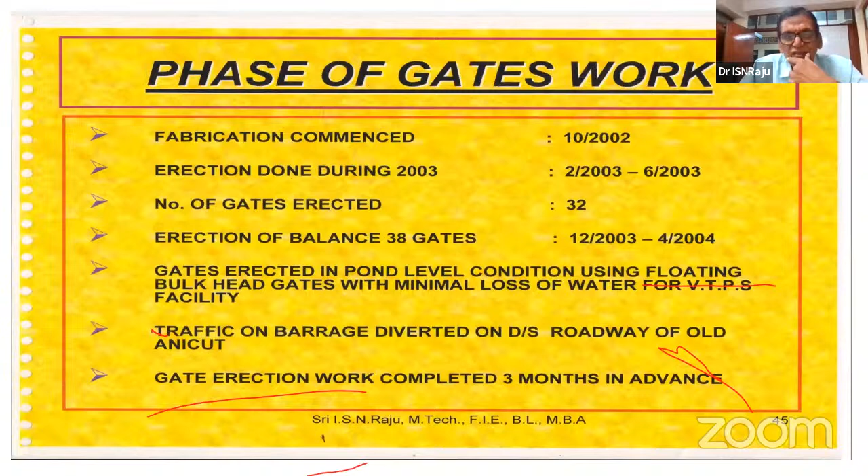During erection time we had stopped traffic on the barrage. Since it was completed 3 months in advance, people appreciated that communication was restored early. So this is about the gates.

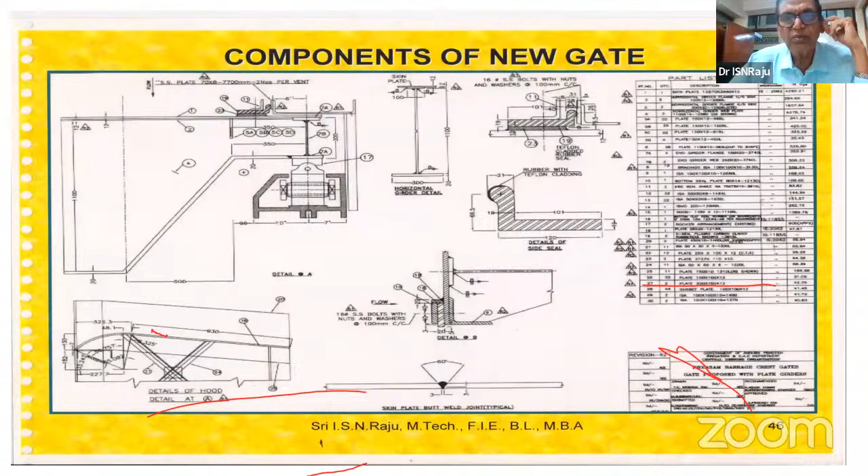The minute details and drawings are there. Again, I'm telling you this will be transparent - all my presentation papers will be open to everybody. You can collect a copy from our Telangana State Center. So this is about the gate.

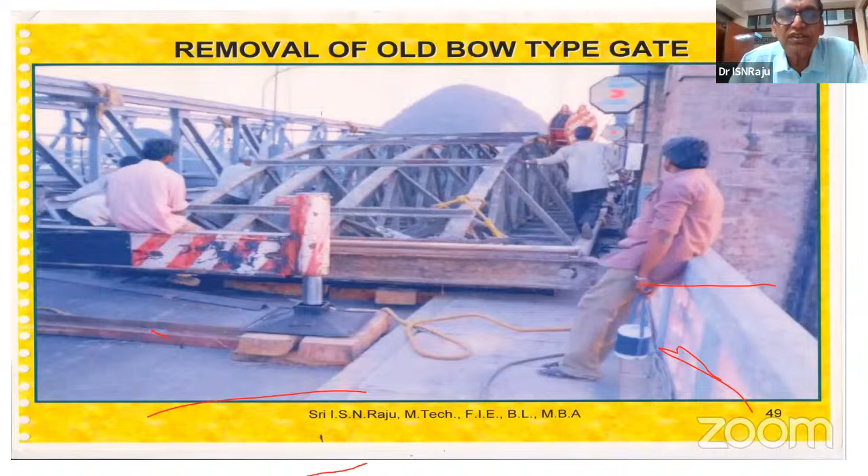This is the gate, you can see it in the longitudinal section. This is the old, rusted gate that was lifted out. When it came down, it was no longer useful - it had rotted. We costed the old steel, and that rebate was taken from the contractor, reducing the cost of the new gates.

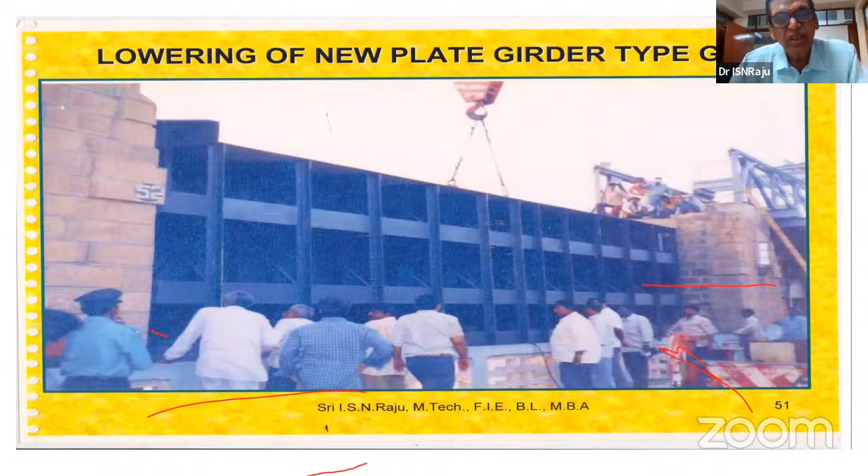This is the new gate. You can see the lifting being done by deploying heavy cranes, and it is put in place. Subsequently, the 2009 floods came after the repairs were done, and the barrage was damn safe - it was tested for it.

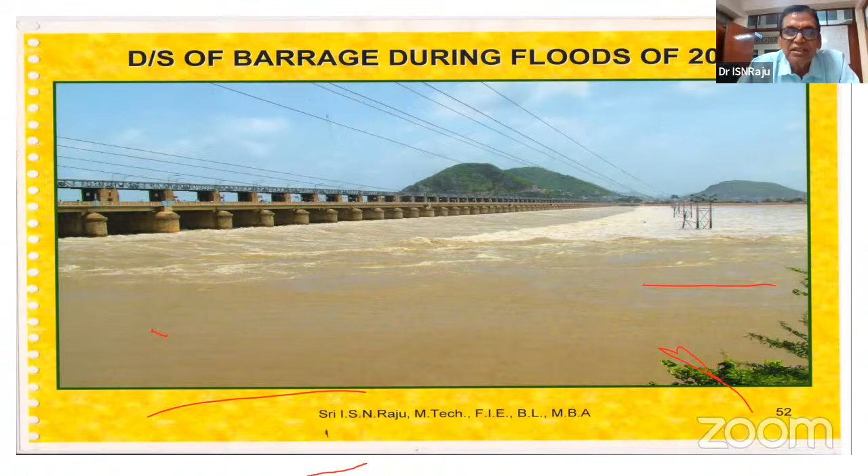One of the papers also mentioned that because rehabilitation was done, the barrage is safe today. There was also a saying by elders that one day the flood would touch the nose ring of Goddess Durga. During the 2009 flood, people feared that Bezawada would get submerged and these barrages would be washed away. But nothing happened, thanks to the great contributions by the team of engineers from the combined state.

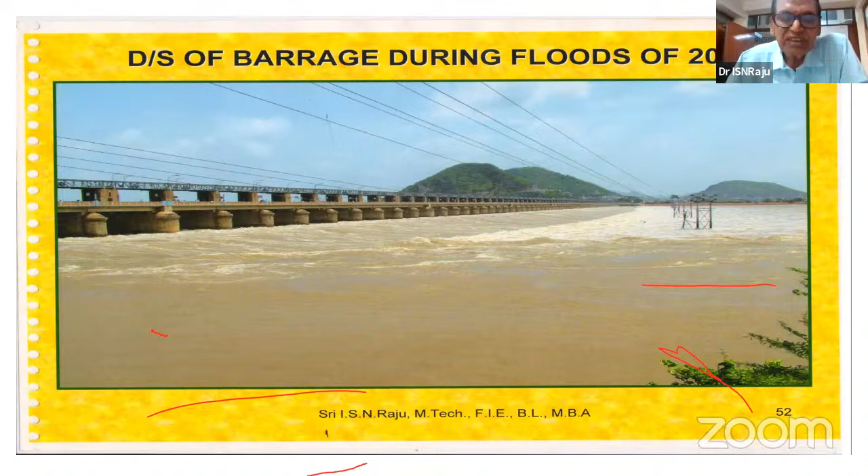Everybody contributed by having a control system and all those things in place. I had some passion and the drive, so the principal secretary at that time asked me to camp at Prakasam Barrage and Srisailam as well.

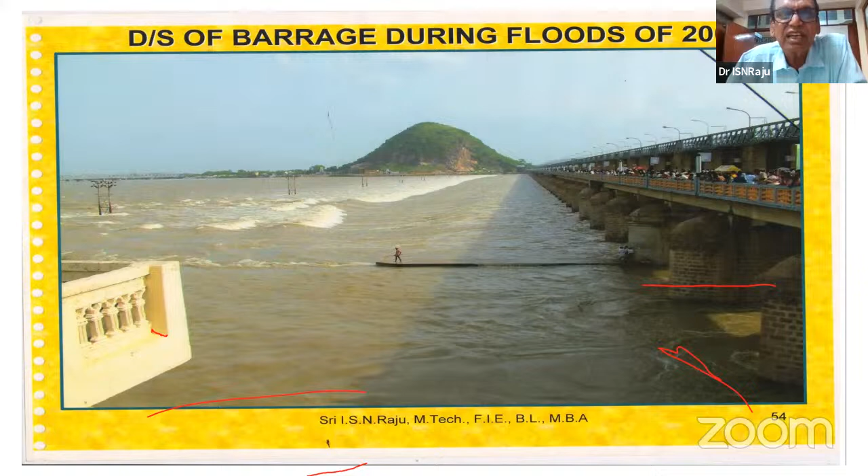You can see the flood-time footage of these tunnels. During flood time, people were wondering how the barrage was actually functioning amid such great floods, with floods everywhere. People came to see this like a pilgrimage.

And this is actually a floating structure. Why I told that the barrage is a floating structure: we can't expect that it is a gravity structure. There is a foundation. So floating structures, and almost simply, the barrage will withstand if properly designed, properly done, properly executed according to the lines of execution of sheet piling. And sheet piling is the best tested cutoff for this one.

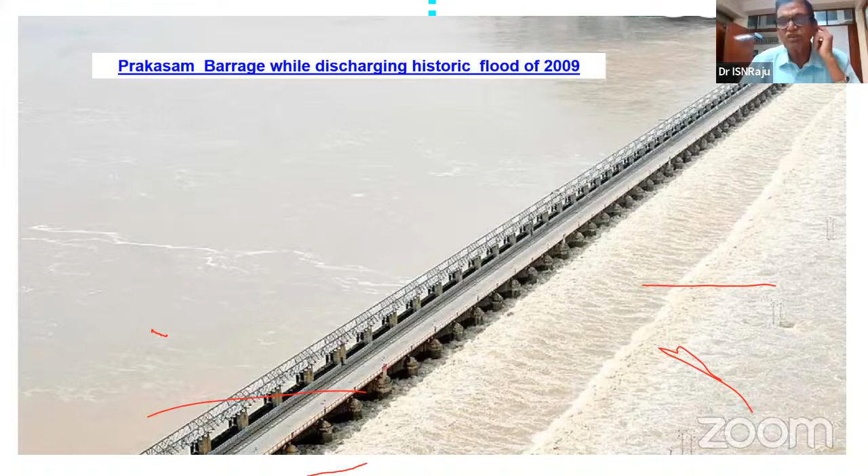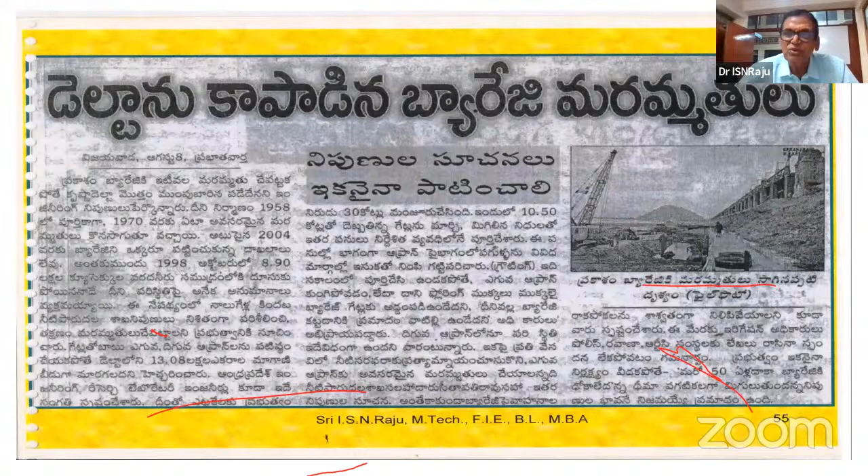You can see beautifully the barrage on either side. It's a floating barrage, a floating and permeable structure. So design must be done and the execution must be done accordingly. So this is one of the news reports; they appreciated it. Rarely the newspaper will appreciate the work done by the departments. So this is one such appreciation; people have told that good work was done. They recapitulated the photos, and also they told that good work was done.

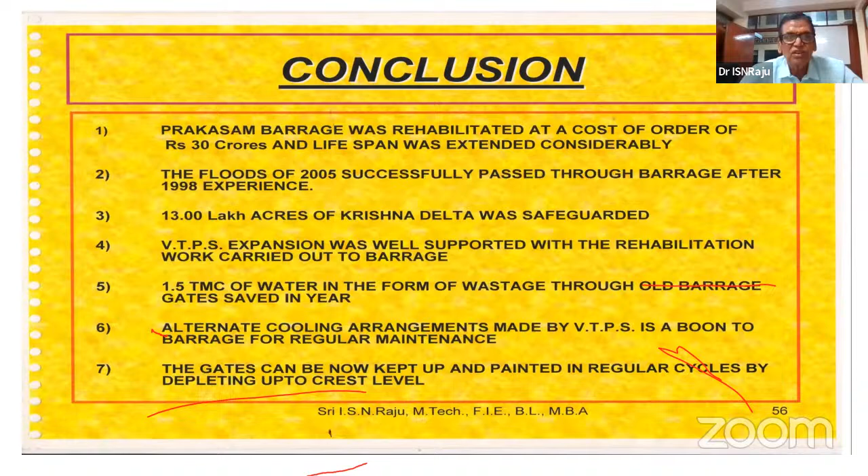So ultimately the conclusion is that rehabilitation is needed for all the structures, whether it has outlived or not, because historic floods will increase, and again we have to test the barrages whether they will withstand. So we need to do that. That's why it was done. And this is one of the greatest works that was done. Even in the 2009 floods, it was able to withstand because this work was done.

So the post barrage rehabilitation impacts are there. Normally earlier the maximum flood was only about 6 to 7 lakhs, but during flood time it was about 11 lakhs. It is sustaining about 13 lakh acres of irrigation. Apart from that, about 1760 megawatts of power, actually the cooling arrangement for thermal power. That is the source, and the life of that thermal power plant also increased.